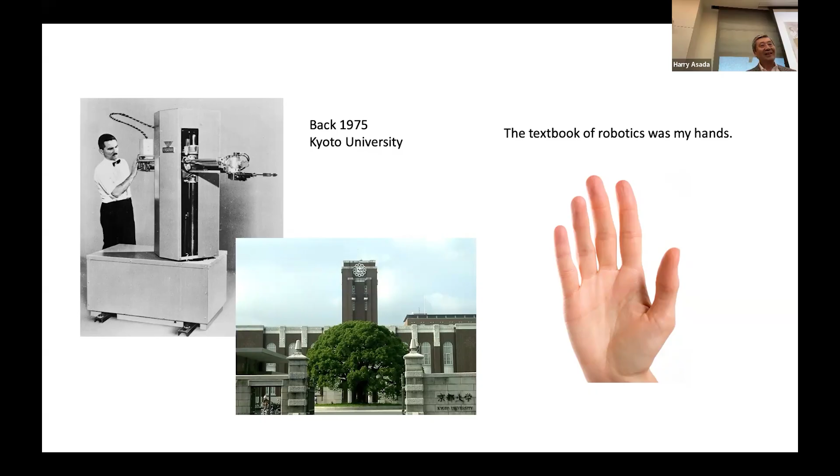So that's when I came up with the ideas on grasp stability. And that was initially my master's thesis at Kyoto University. This is to define some sort of potentials associated with the mechanical things that interact with the object, and that creates a kind of potential curve, up and down, depending on the shape of the object along with the robot hand itself. If you plot the isopotential curve on the pose, position, and orientation of the object, you see a nice local minimum here. This may be a good point because any deviation from this point creates a restoring force, which means a stable grasp. So that's a simple explanation.

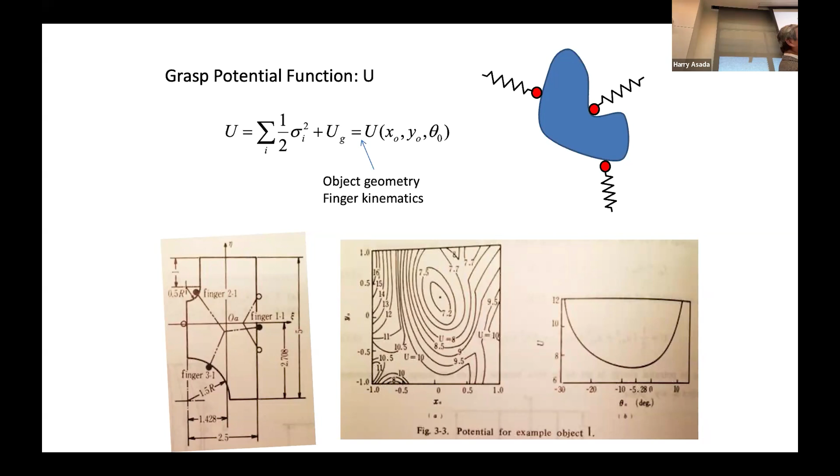At the same time, just several years after that, I found a very beautiful doctoral thesis by Professor Oussama Khatib, who also used potential functions for a totally different, clever use. Now, implementing the stable grasp or this kind of hand manipulation based on the compliance matrix, I had troubles because it's hard to generate and control the torque and force on the fingers. So I came up with this actuator design.

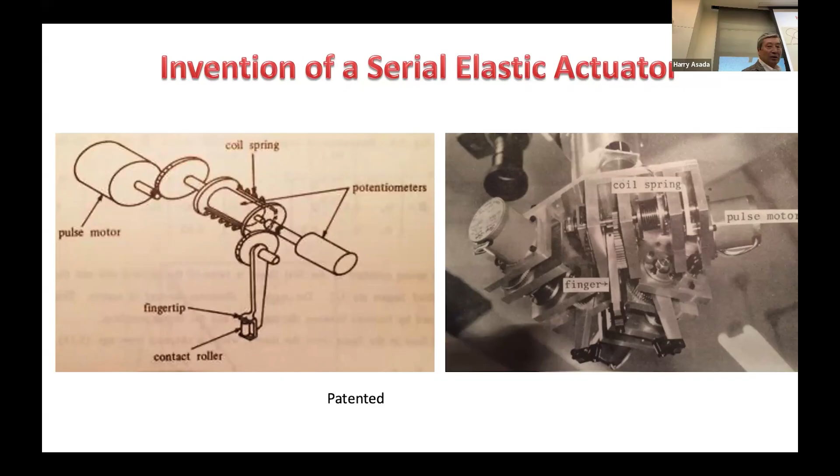This is the first serial elastic actuator, and the actuator here, then the fingers and hands are in between. We have a coil spring, and by measuring the torsional distortions of this coil spring, we can get the measurement of the torque transmitted, so closing the loop out of it.

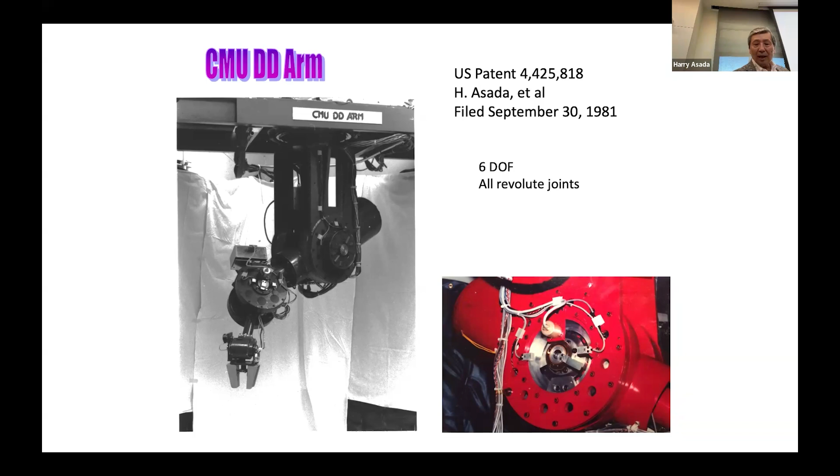Human-like actuation is so important, and when I moved to Carnegie Mellon Robotics Institute, I happened to find an article talking about a new type of high torque motor. At that time it was an emerging technology, rare earth samarium cobalt magnet producing 42 megagauss Oersted magnetic strength. That was actually a big groundbreaking thing. Together with high power MOSFETs becoming available, we could drive large current into this. That allowed me to develop the first direct drive robot, all 6 degrees of freedom. It's direct drive, having no gearing, so high, no backlash, and pure torque control.

That was immediately commercialized by Adept Technology in Sunnyvale, I think—I just forgot the name nearby. And then this spread out to many manufacturing sites. In Japan, Yaskawa developed the direct drive robot for clean room applications, handling wafers. This is a clever idea because direct drive doesn't produce any particles or dust from gear meshing, since there's no gearing.

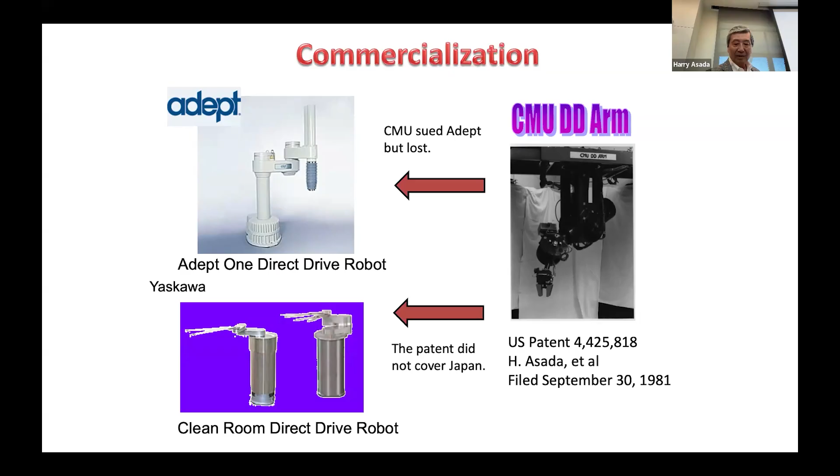Going to 2012 at MIT, around that time I'd been supported by Boeing for about 10 plus years, and I had a chance to learn at their manufacturing site. This is the final assembly of a wide body commercial aircraft, and you see those people working either on the ceiling or the ground. That kind of work is not good for the human. The human body is not designed for doing something near the floor.

This is the motion, and this is Boeing 767 cargo space assembly—you have to take this posture the whole day long. It's nice if you have extra arms holding your body, right? Because you need both your arms and feet when you're doing this.

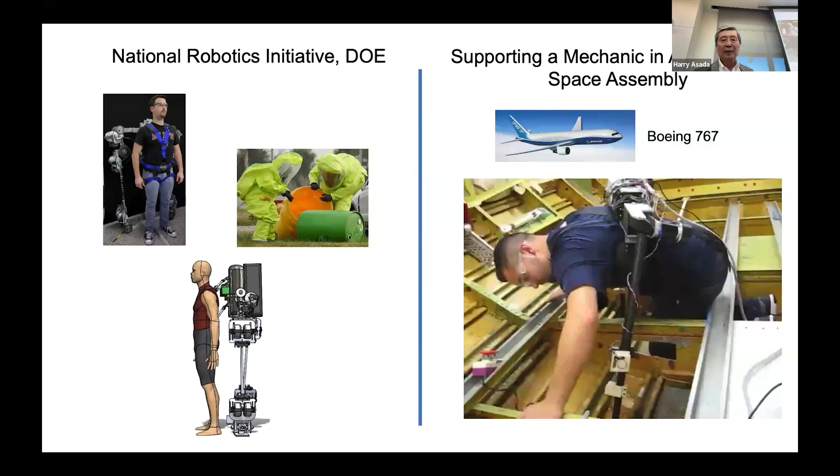Later, the Department of Energy provided a grant to develop assistive machines as shown here. Every year we came up with some ideas. What if you have extra limbs at certain locations? It creates all kinds of interesting things.

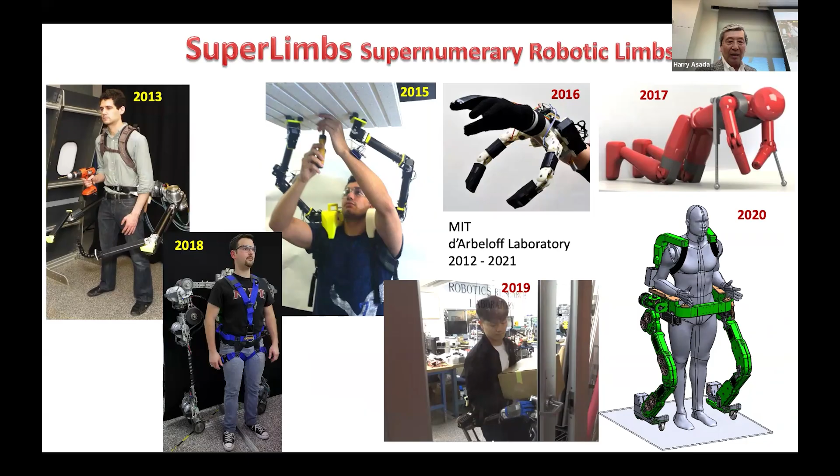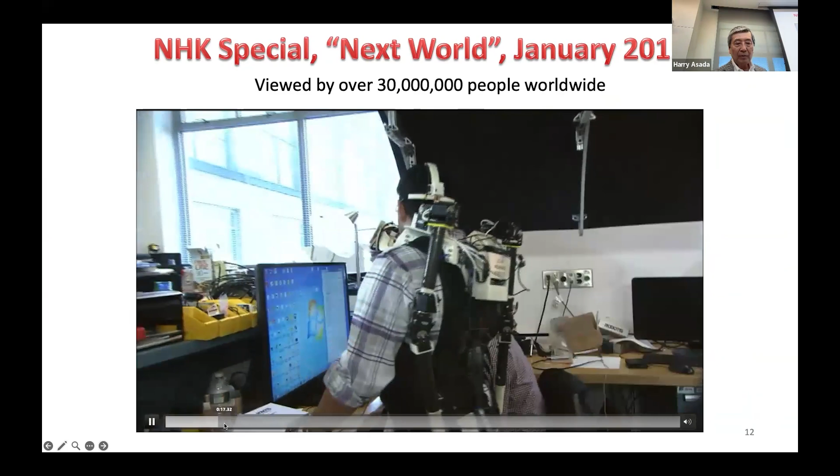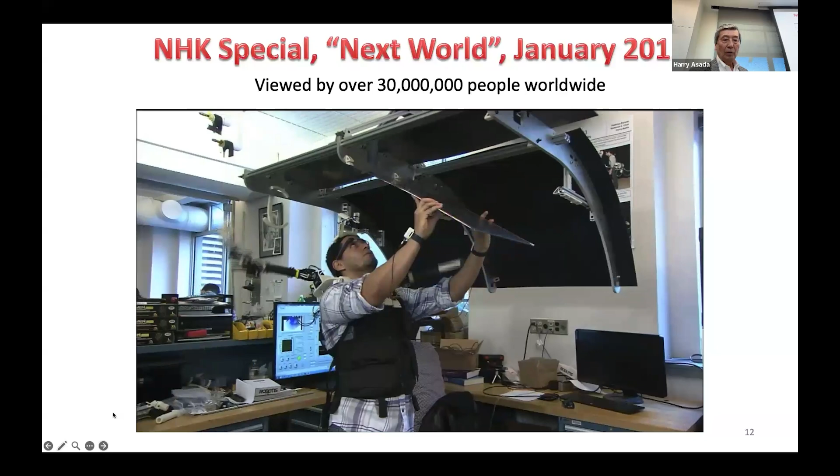And then actually, seeding work—at the Massachusetts Institute of Technology, robotics researchers are developing ways to add an extra pair of arms to your body. The robot will try to act according to what I'm doing. Robotic arms come to life thanks to artificial intelligence. The AI system monitors the wearer's arm movements, and eye trackers detect where the person is looking. From this data, it predicts the next movement of the wearer and automatically moves the robotic arms to a supporting position—no explicit human input is needed.

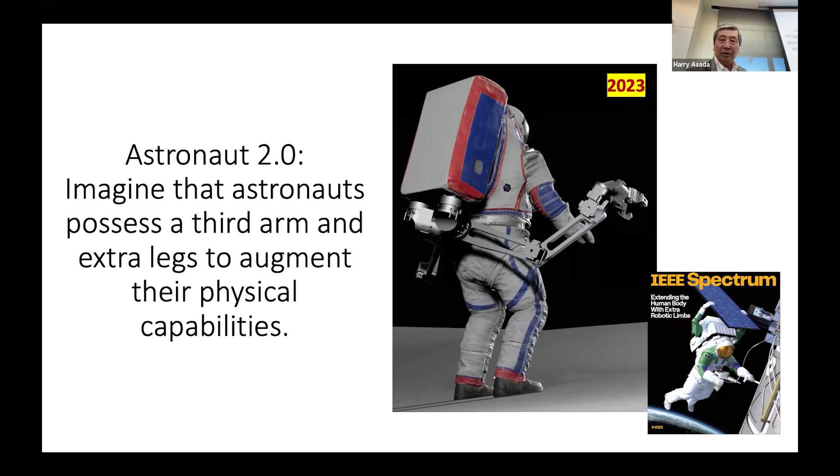Yeah, maybe that's good enough. But then the most exciting application I found for these SuperLimbs, supernumerary robotic limbs, is space applications. This is a 2023 IEEE Spectrum article. We can attach a pair of robotic arms to the life support unit in the backpack, substantially increasing the physical capabilities of astronauts. So going back to the moon, astronauts must conduct quite extensive physical work on the moon's surface, and that's actually a big question.

Remember that in the Apollo era, astronauts were superhumans, super athletes, but when they fell on the moon surface, it was hard to get up—sometimes they struggled for more than 10 minutes. So this is the reality.

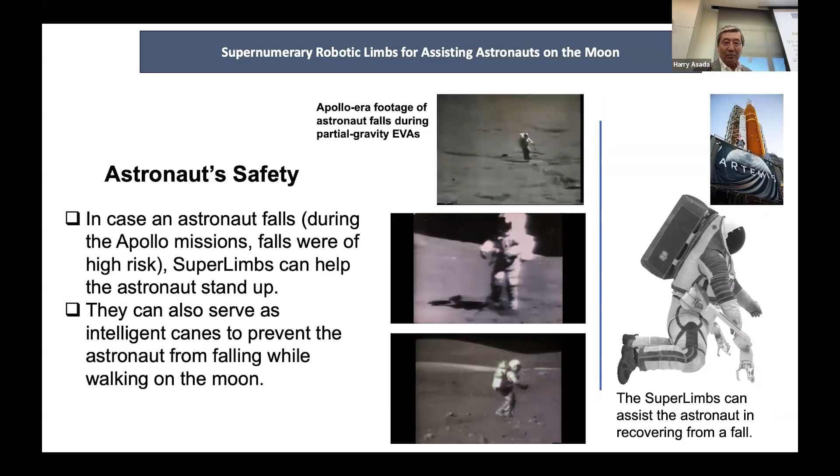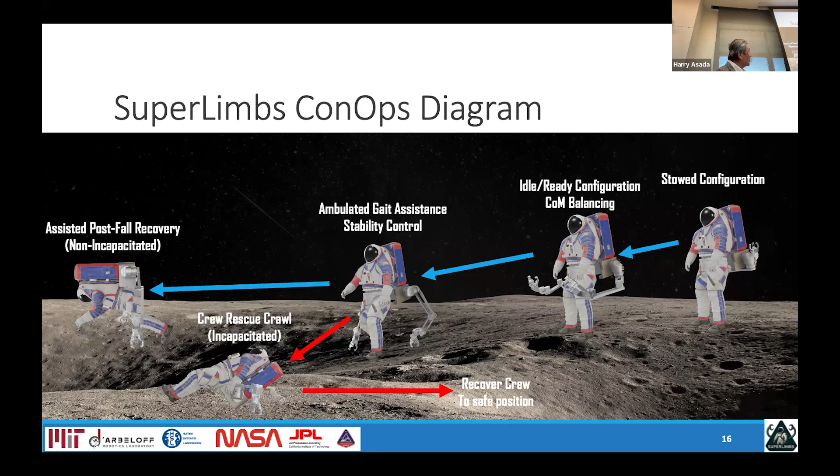So we propose: how about having a third arm and a fourth arm attached to their body? This is the stowed position, it comes in here, and when needed, it comes out to make balance or bracing, or if necessary becomes extra legs, so the human becomes a quadruped instead of a biped. That may be necessary when moving on very rough terrain. And once they slip or fall, we actually assist them to come back up.

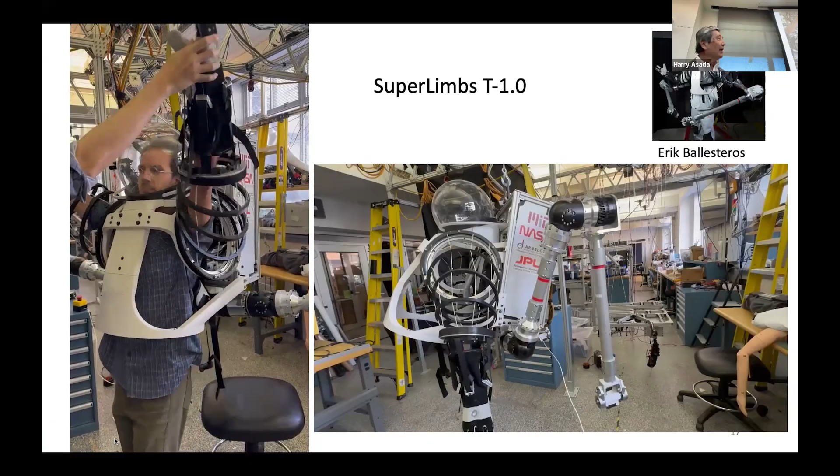So this is the most recent machine that we developed together with JPL. It's hard to get inside, but you see a pair of robotic arms coming out of it—it has a 4 plus 4, 8 degrees of freedom for 2 arms, and it produces plenty of torque to lift and to stop.

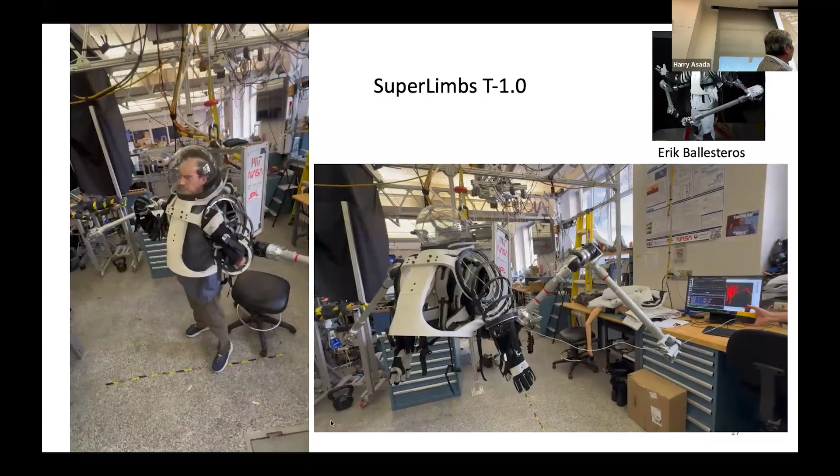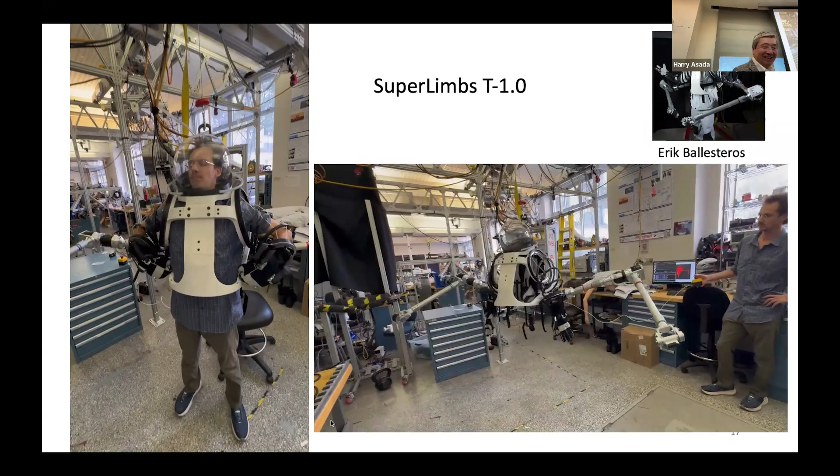Unfortunately, we haven't got the IRB approval, so I can't show you the real humans working together with this robot. So that's where we are.

And interestingly, the work on the astronaut assistance and elderly care, they are so close, because once you wear this space suit, it is pressurized inside, you know that, right? And it's just very stiff. So astronauts have to work against that stiff joint. So the net muscular strength is very small. Also, the visions are very limited, right? And then balancing is an issue, that they fall. The same story as we see in elderly care.

So fall is actually the big problem for the elderly community, and many of them underestimate the risk of fall. I'm okay, and then they fall. Or they overestimate the risk. I don't think I can do that. So staying, sitting on a couch all day, stop taking any necessary exercise, that actually increases the risk of fall further, and then they fall.

1 in 4 U.S. older adults, 65 or older, fall, and then totally 37 million fall cases are reported. So we need to do something to support the elderly person to take a safe exercise. And this is a robot holding. Well, in case she collapsed, she's young, but in case of the old person, the robot can hold. Or this is actually a new version. It's almost a passive one. It moves together with this Tai Chi exercise.

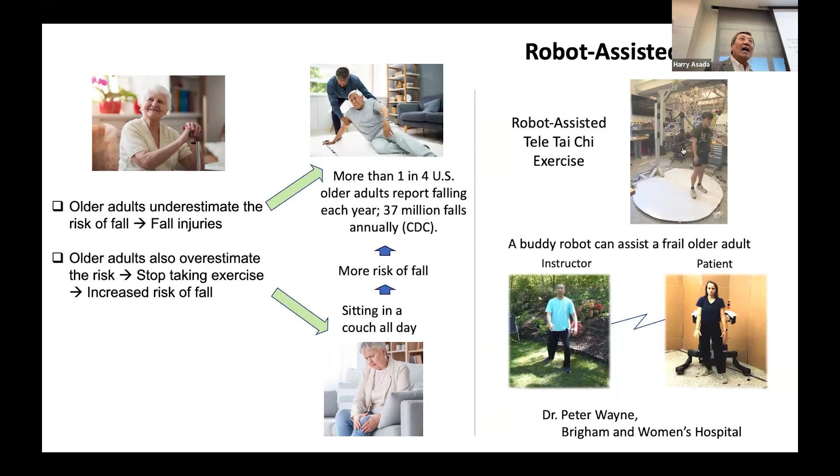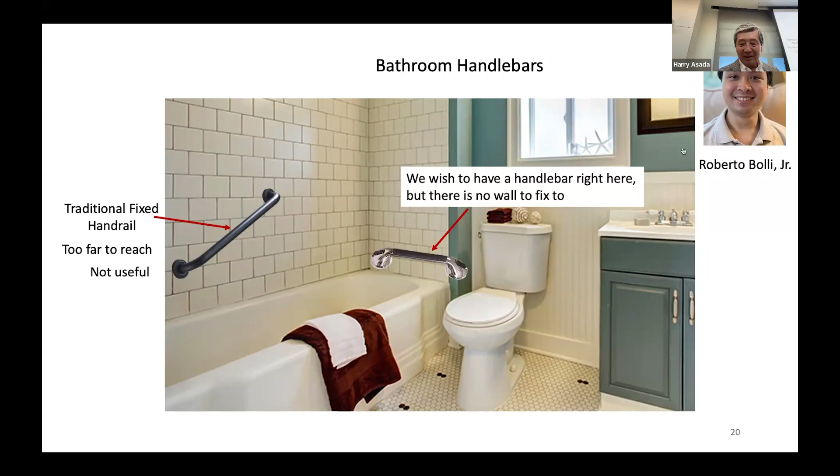Now, I think one of the most successful devices we have developed is so-called Handle Anywhere. So elderly persons today do need some handle to grab, right? And typically you place it in the bathroom like this. But fixing this handle rail on this kind of wall, it's too far to reach, and it's not really useful. We wish to have a handle here, but there's no wall. You can't put it here. Well, that's not the case if you have robotic solutions.

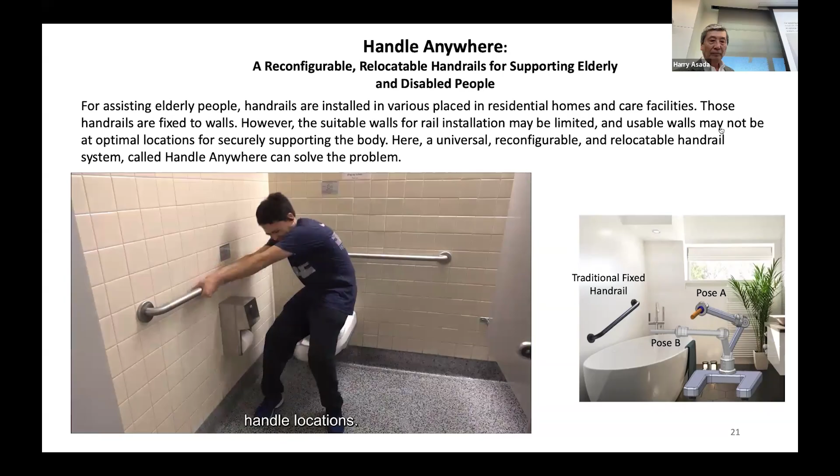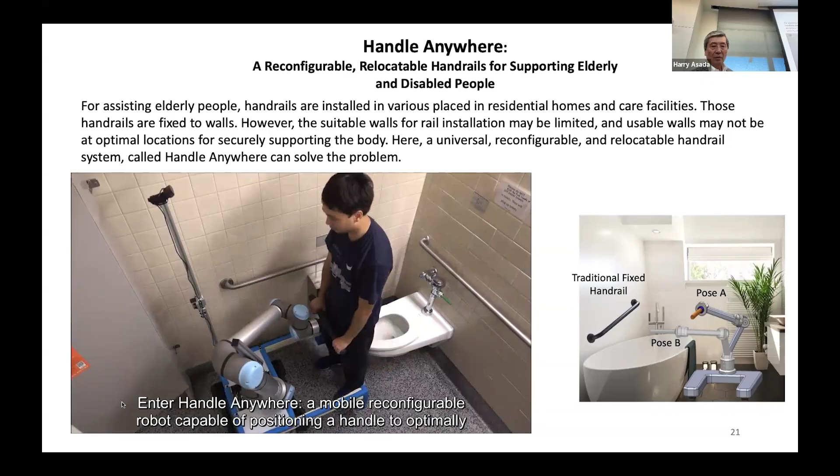As people age, grab bars are commonly installed around the home environment to provide stability and support for everyday activities. However, grab bars are costly and constrained by the room layout, resulting in suboptimal handle locations. What if there was a way to put a handle where it would most support the body? Enter Handle Anywhere, a mobile reconfigurable robot capable of positioning a handle to optimally support an elderly patient. Yeah, so this is the new version, E-bar, and we extended the capability much higher.

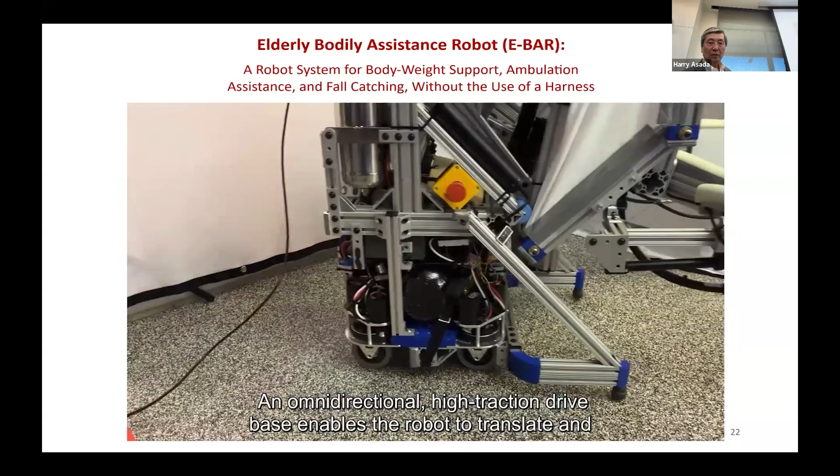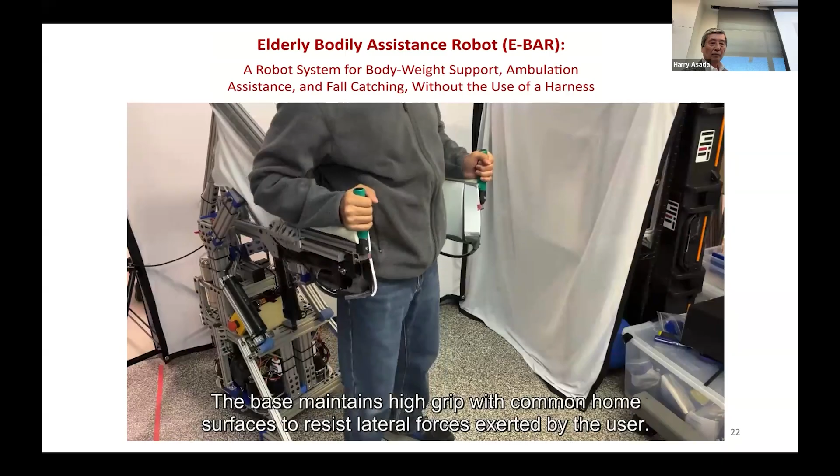Including lifting a person, assisting with postural changes and ambulation, and catching a person during a fall, all without the use of any wearable device or harness. An omnidirectional, high-traction drive base enables the robot to translate and rotate in any direction to support natural human motion. Each wheel's orientation and velocity are controlled independently. The base maintains high grip with common home surfaces to resist lateral forces exerted by the user. With a minimal width of 38 centimeters, the robot can navigate through obstacles in the home environment and has the ability to lift users across gaps such as a bathtub lip.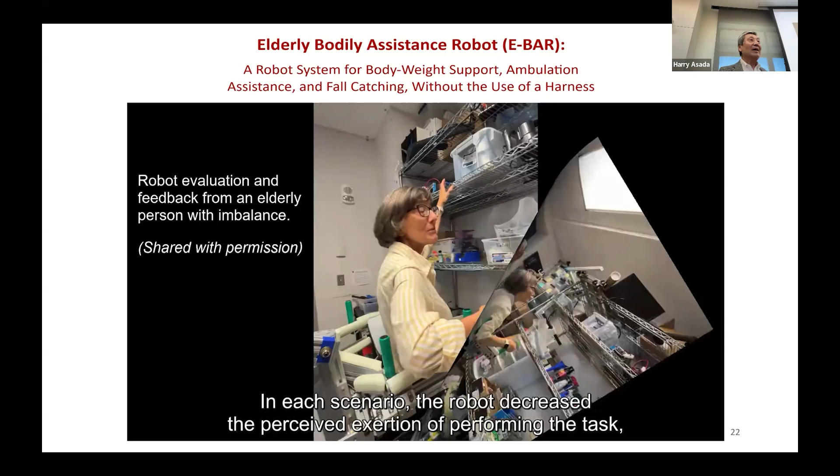Yeah, this lady, our neighbor, volunteered to be a human subject here. She had brain surgery some time ago, and every other month she slipped or nearly fell. So when she tried to reach some high locations, she had to hold something. And when she tried to reach some low part, it's very dangerous. So she needs to hold somewhere there. She needs something to grab anywhere. That's the Handle Anywhere concept.

So now the Handle Anywhere project is going further. We are developing new versions, virtually creating 3 grab points for the sit-to-stand process. We try to find the best location for the grab bar, and that actually varies depending on the process. This is a multi-phase process, and as a human stands up, the best location of the handle is different. So we have virtually 3 handle places.

I can't talk about elderly care without talking about the collaboration with Stanford, in particular Prof. Allison Okamura's group, with a fantastic project that I very much enjoyed, and I learned a lot, under the NSF Convergence Accelerator project: soft growing robots and mobility assistance. And everyone knows her groundbreaking new work on the application of the vine robot.

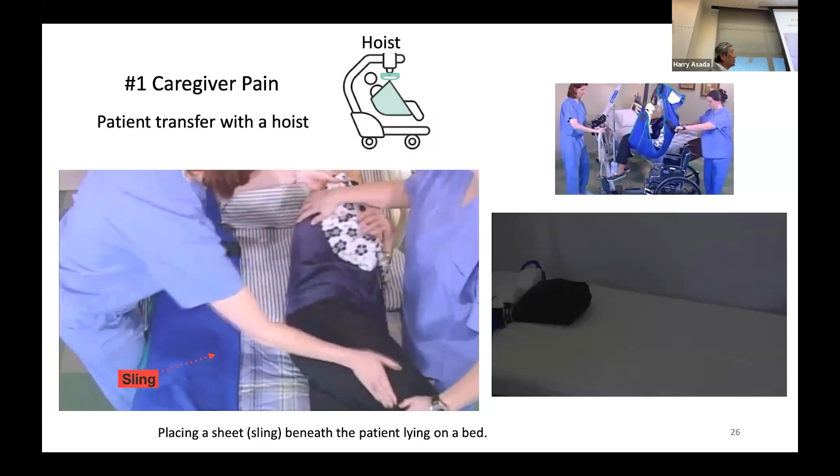And in this case, it's going beneath the person lying on the bed. So it's easy to lift up the person because the sheet is already in place. Before this, we had to do this kind of stuff. Two caregivers roll the patient on each side and spread out the sheet before lifting. So this is a very laborious process. Two persons are needed. It's much better to do this with Okamura's vine robot, which can do this very quickly.

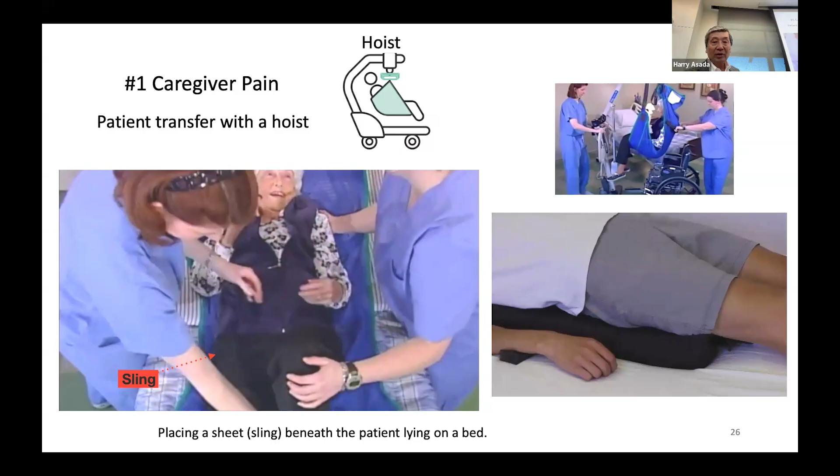So let me see. I just talked about many things. So how are you doing? Is this okay? Any clarifications and questions up to this point? Okay. So let's move on to the second half. Yeah.

On sale? That's actually what I heard, so show this to the people. Can I buy it now? Oh, well, this is still the research phase. So my students formed a company, and it's not actually this form, but they're putting together something to deliver the stuff to those people who desperately need it anytime soon. Okay, so let's move on.

So the next topic is actually back to that sit-to-stand problem. I said it's going through multiple stages: first, moving forward, creating a momentum. It is converted to upward motions, and at the end, we arrive at the stable position. Kind of a feedback control is working. We don't know when and how the feedback control kicks in, but there are some very smooth transitions.

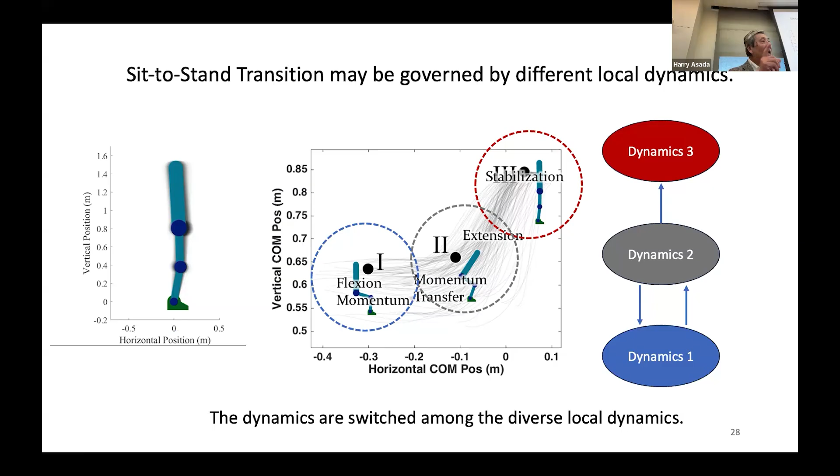So we found that humans are very good at controlling multimodal things. And this is so-called switched dynamical systems. Many of the hard robotic problems are basically related to switching of dynamical systems. In gait walking, you see the change of modes: one leg contact is basically an open kinematic chain, and with two legs it's a closed kinematic chain. Totally different dynamics are switched. We don't know exactly how they switch, but there's something going on.

Also, in manipulation, breaking and making contact changes the dynamics, and there's something we should explore in that. But it's actually a hard problem. Each dynamic mode is governed by different dynamic equations. We can simulate this process, but it's hard to gain the global picture of what's really going on, and actually come up with some feedback control. That's a hard problem.

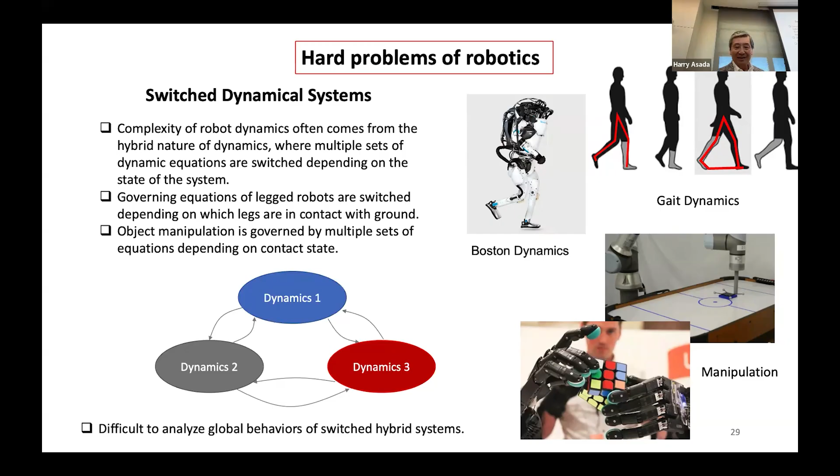So what I'd like to propose is to use the Koopman operator as a mechanism for unifying otherwise segmented and switched dynamical systems, subsuming all the segmented dynamics within a globally linear model, which is obviously very amenable for control. This is kind of strange because each dynamics is nonlinear, and putting them all together, we write one equation which is globally linear: A times something plus B times the input. This is just the standard linear state equation that you learn, right?

So once we can transform this into this form, we can use any kind of rich linear analysis and control techniques, including model predictive control. It turns out that this optimization is convex, and that's very efficient in real-time computation. I want to show you this applied to both locomotion and manipulation. Locomotion is the rimless wheel, and then pushing and shoving. If time permits, I'd like to talk about sit-to-stand transitions, which is a human neuromotor control problem.

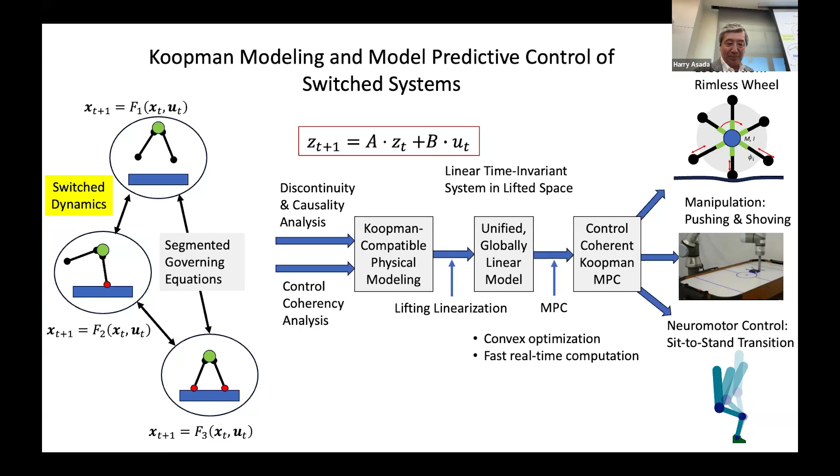So first, let me describe how this can be reduced to this form. There are certain conditions the system must satisfy, and that is something I'd like to explain. First of all, the Koopman operator is very mysterious, and I think some of you already know it, but bear with me; I'd like to explain this in a very simple and intuitive manner so that everyone can understand the basic principle behind it.

So let's consider the nonlinear dynamic system in discrete time. F is a function mapping x_t to x_t+1. Now we also consider a set of orthonormal basis functions, phi_1(x), phi_2(x), and so on, in the Hilbert space; don't bother about the Hilbert space.

So we consider the composition of the basis function phi_i with the self-map, this state transition function F. What this means is that we replace the x here by the function F(x), and we write it phi_i, small circle, capital F. This is a new function, and if this function has good properties in the Hilbert space, this new function can be expanded into a series of the orthonormal basis functions phi_i.

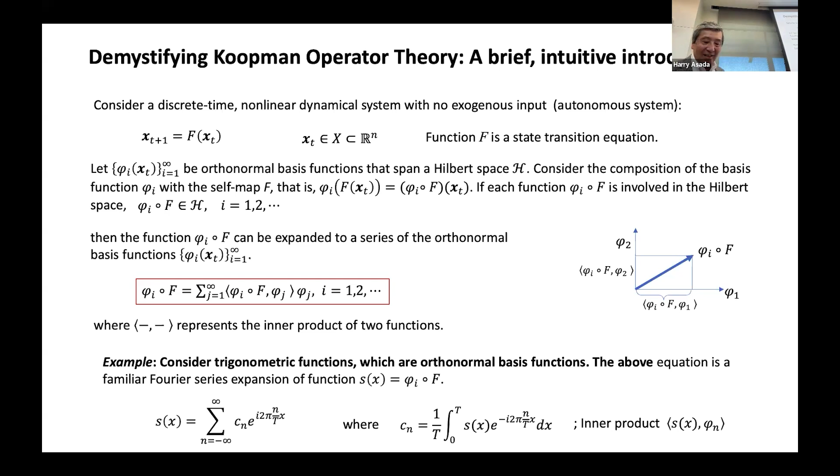So this is something, doing this. But this is a very important expression. Just keep in mind that this guy is to be transferred to the next line. So here, on the left-hand side is phi i small. This is the compositional function, and what is inside is actually phi of f(xt), and f(xt) is basically the state transition function. So what this means is basically xt plus 1.

This guy. So this one really means that the values of the orthonormal functions, the directions, evaluated at the next time t plus 1, state xt plus 1, equals phi j of xt, right, weighted by these coefficients, which are actually constant, and then we can put them in aij.

So what this means is that the next step of the state phi t plus 1, viewed from your new coordinate system, which is actually orthonormal, where we put all these elements into a big vector, which is infinite dimensional, is given by this coefficient aij times the current time xt's states, the big ones, and in between you have this matrix aij. So this one is linear. We started with nonlinear, but this is linear.

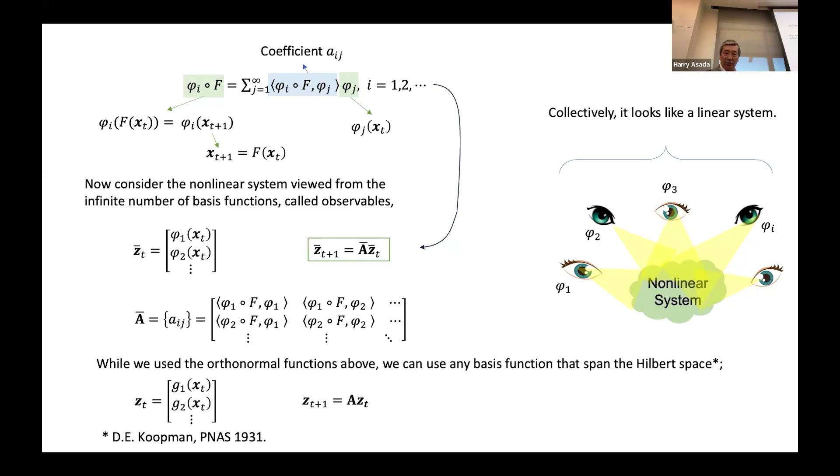I started with the orthonormal functions to begin with, but it doesn't have to be. You can use any basis functions that span the Hilbert space. Then we can do that. So we can very much relax these conditions, shown here. Now, this is actually the original Koopman operator theory. Unfortunately, this is applicable only to so-called autonomous systems, with no control input.

So, no control, no u, and what we are interested in is something where you have control terms over here, right? So the first job I did was to expand autonomous Koopman to non-autonomous Koopman. This is a hard problem, but the idea is the following. This is the full nonlinear state equation, xt plus 1 equals f of xt, ut, and this is not actually the form where the Koopman operators are applicable. So we do some special treatment.

First of all, we divide the independent state xt into two parts. One is the state variables related to the actuator side. The Qt is all the other things, the plant side. So we divide it into these two, and then we assume that the input ut terms show up in these nonlinear equations in a linear form. BP is constant. We found in many systems that this kind of linear control term can be found.

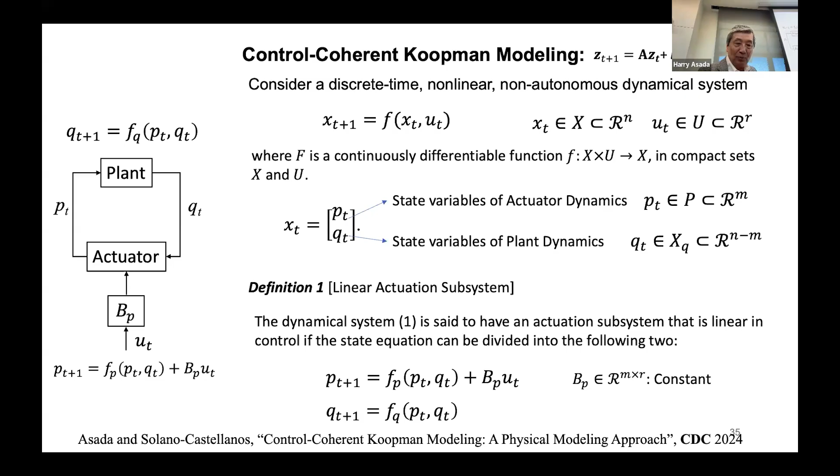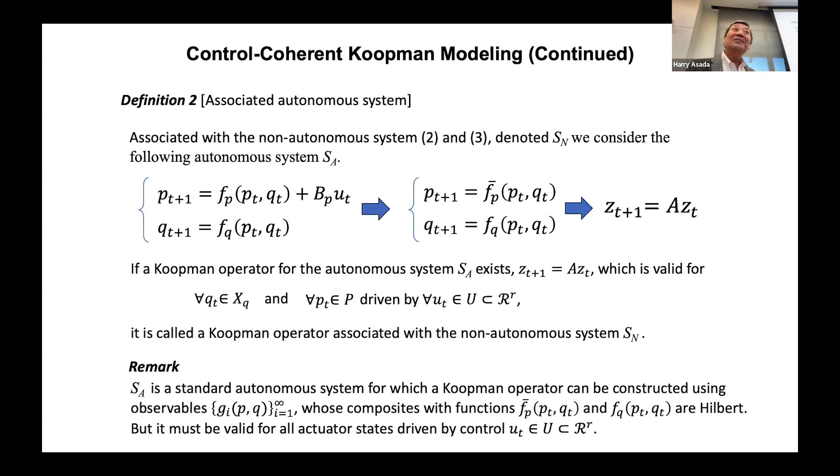So once we found this kind of relationship, we can apply the Koopman in the same way as the original form. First, we get rid of these terms and work out the autonomous system. This is a standard Koopman operator problem. We can reduce this one into this high-dimensional linear form. And then after that, we can simply superpose the linear control terms. The proof is a little bit more involved, but that's all you need to know.

More importantly, the conditions under which this method is applicable are that the control input appears linearly in the actuator dynamic model. So this is modeling property 1. And then also, importantly, the actuator and the plant have independent state variables.

So to satisfy these two conditions, let's look at just standard robotic systems where we have motors and the gearing, oftentimes harmonic drives, and then the arm load. So if we include the harmonic drive's compliance, which is somewhat significant, the joint displacement and the motor axis displacement can be treated as independent generalized coordinates, so independent variables. And also, if you put together the equations of motion of this motor, since motor rotor inertia is constant, the input appears here linearly.

We found similar things in the hydraulic and pneumatic soft robotic systems too. And also interesting is to look at the bio and mechanical muscle systems too, having nice springs in there, and that allows us to apply the Koopman models.

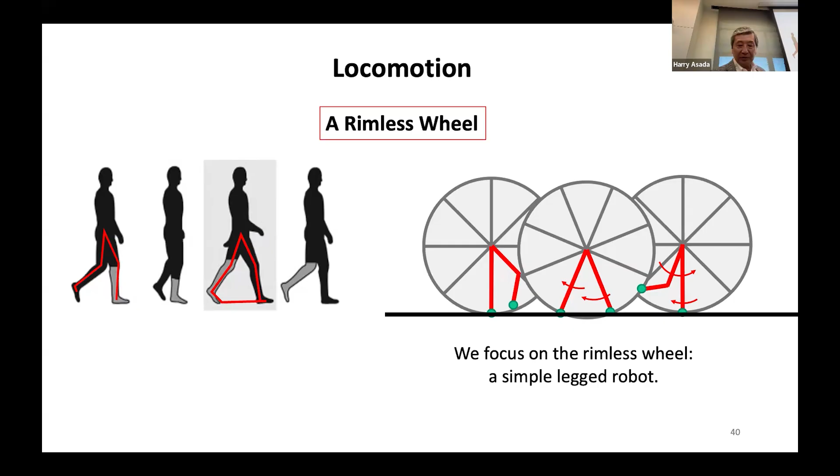Okay, so let's look at the locomotion problem. The simplest model that we like to look at is a rimless wheel. The rimless wheel is mimicking some of the human gait in the simplest form, but we push it a little bit further to make it active. So in this case, 6 spokes, 6 legs, each having an independent actuator pushing the legs, changing the spoke lengths. To describe the hub we have x, y, and theta, three coordinates, along with the spoke lengths generated by the actuators, in this case 6 spoke lengths.

Are they independent of each other? Well, when it is airborne, absolutely, they are independent. But if they are in contact with a hard surface, some conflict happens. The x, y, theta side and the phi side cannot dictate their positions independently. They have to conform to some constraints. So that kind of conflict occurs. But if you consider some compliance at the floor or the spoke, we can resolve that kind of conflict. So compliance is very important here.

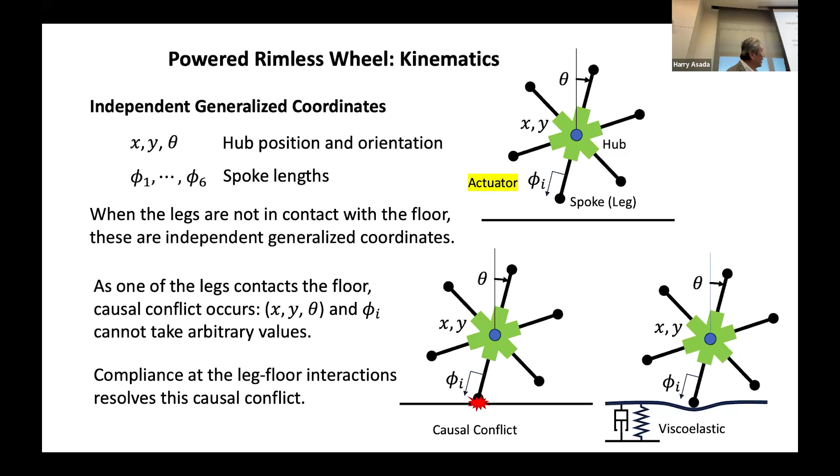And in the legged research community, they have been studying the compliance of the foot and the floor for years. We just pick the best one and put together the actuator side of the dynamic equations. Although the ground reaction force is a highly nonlinear term, if you look at the actuator dynamics equations, all the inertia reflected to the actuator axis is Im, which is linear and constant, and the actuator torque applies here. Because Im is constant, the actuator input is introduced linearly. Even though this part is nonlinear, that's okay. So having this compliance with this dynamics, we solve two problems.

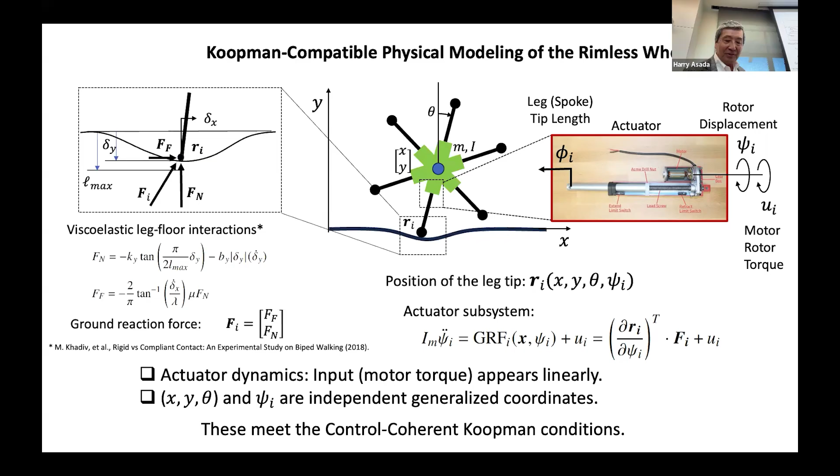One is that the Koopman operator can be applied because of these two independent variables, and switching from no contact to contact is not discontinuous because of this compliance. So these two support the application of the Koopman method. Again, the actuator side of the dynamics can be reduced to this linear form, along with the nonlinear terms. The hub side of the dynamics is governed by the ground reaction force, which is highly nonlinear, but there's no direct channel from the input u to this dynamics. So that satisfies the conditions, and then we can build the Koopman model.

So interestingly, this is a linear model. We apply it to model predictive control, using a penalty for tracking deviations and a penalty for the control cost, subject to linear dynamic equations along with some other linear constraints. We can solve it very simply. Looking at the time horizon, it goes through contact state transitions, but along this time horizon different modes of contact can be predicted.

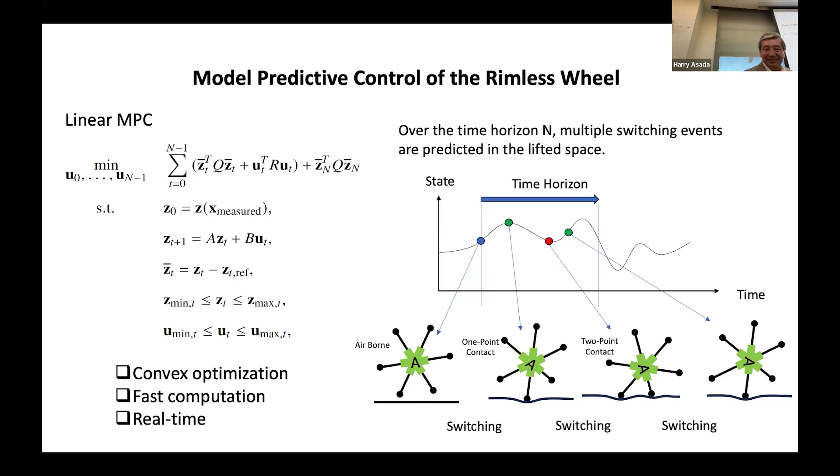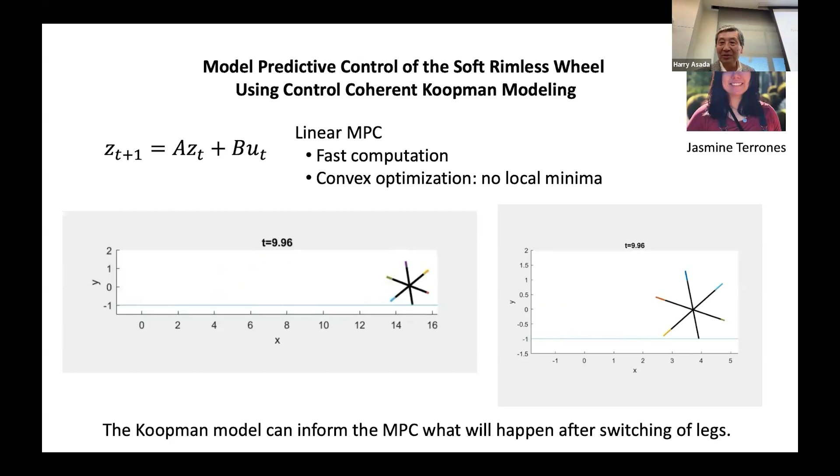So it goes through the different contact domains, with boundaries existing. If you just take a Taylor expansion type of linear approximation here, you have no clue once it moves to these regions, right? No information about it.

But Koopman, because it's globally linear and subsumes all dynamics, knows what's going to happen after you make the transitions like this. Of course, this works when you can foresee a certain time horizon. If the time horizon is very short, it cannot actually discover the right schemes. And expanding the time horizon to 12, okay, very beautiful. 8, we can make it.

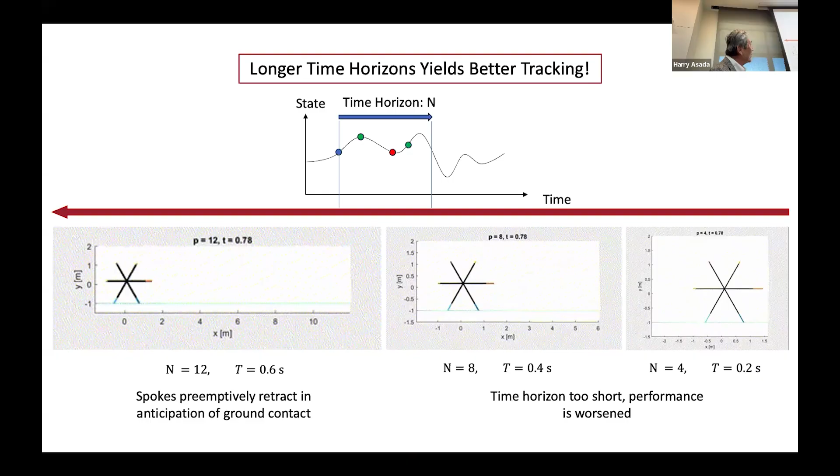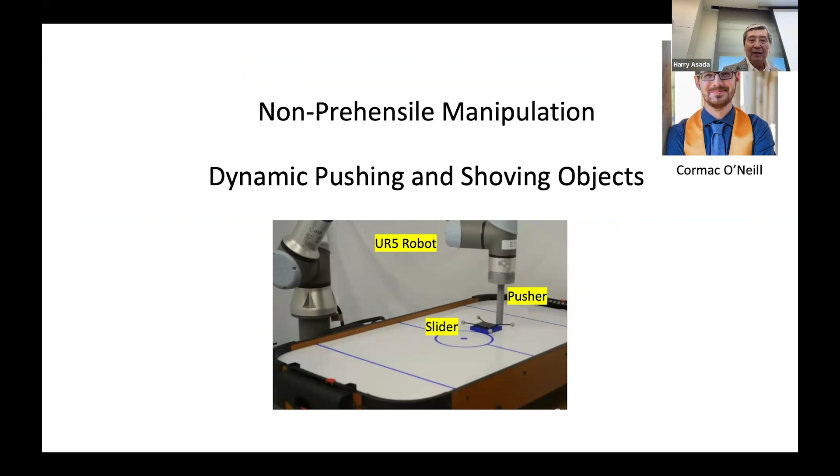Now let's look at the manipulation. So this is actually non-prehensile manipulation. And so this is sort of the state of the art, I would say, about several years ago by my colleagues François Hogan and Alberto Rodriguez. They did a beautiful job manipulating this, but they have to assume that this one is quasi-static, and the contact must be maintained all the way through.

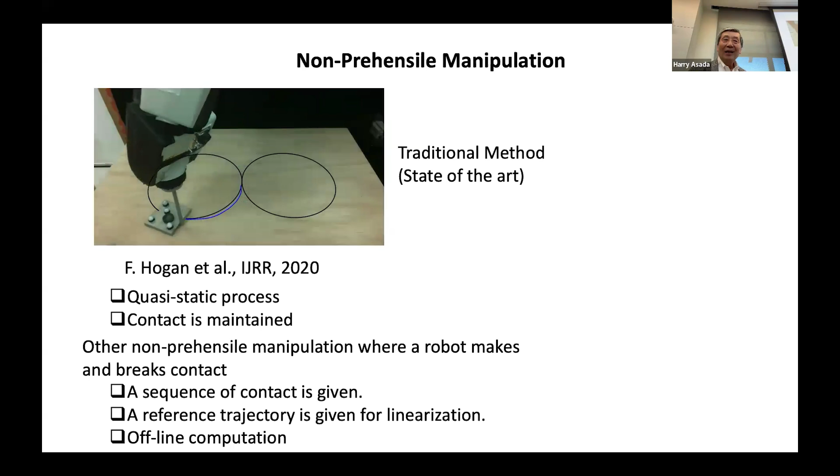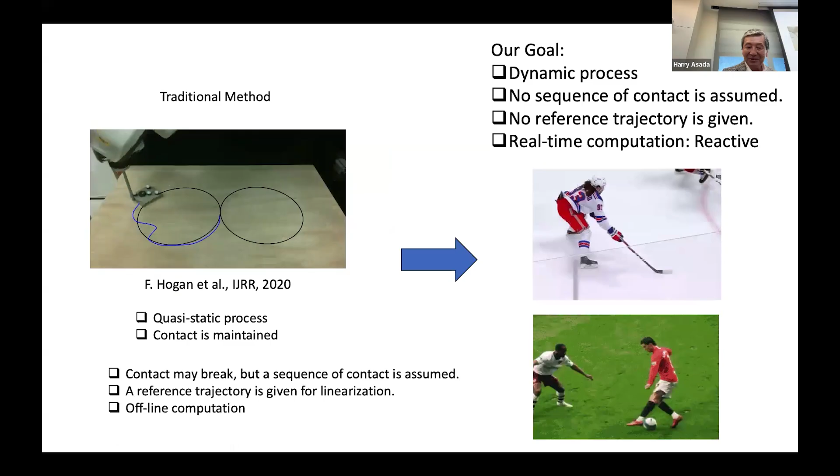But my interest is going to this, right? Humans are much more dynamic, kicking stuff, sometimes dribbling something, shooting. Yeah, that's what we want to do. How can we move up to that point? Well, we did it with this simple robot, this UR5, having pretty good and high fidelity velocity control.

So actually commanding each X and Y axis, moving at the specified velocity UX and UY. And then the resultant position is simply the integration of these two. So we treat all this as actuator dynamics, with the inputs UX, UY involved linearly in this actuator dynamics. And then the integrals PX, PY are the state variables on the actuator side. Now, on the object side, the slider side, we have 6 state variables, X, Y, theta, and their time derivatives. Are they independent or not?

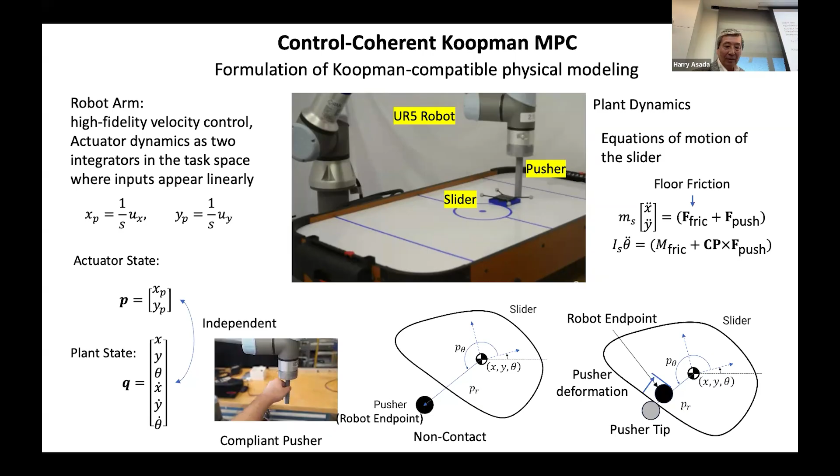We have to include some kind of compliance, so we intentionally use some compliance on the pusher like this. The indentation into this creates a force in proportion to the displacement. That's the system modeling we did. So with that, we first model this, and then the next big one is that we have to create these basis functions, called observables. What sort of functions can do a very good job at that?

We use a deep neural net, providing some data, data-driven systems. It defines the best set of basis functions or observable functions, because it has to be in a finite state, and depending on the quality or effectiveness of such functions, sometimes convergence is very slow, and sometimes it's very good. So the neural net is very effective in finding that kind of stuff. With this, we formulate the Koopman models, and then go to implementations.

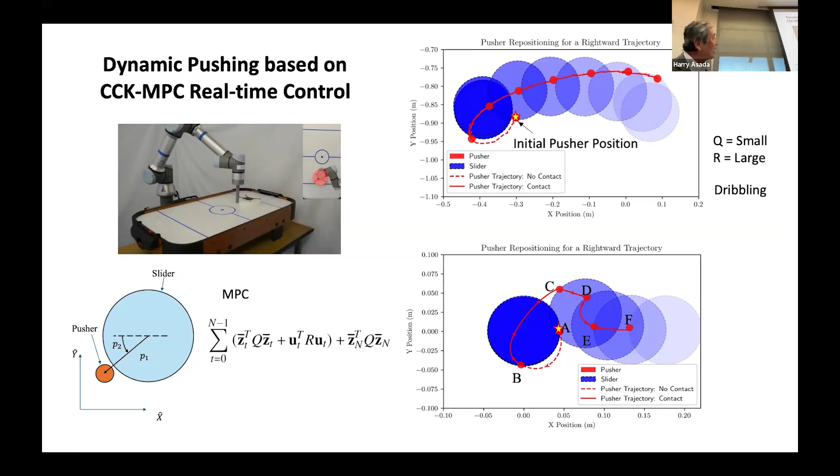So these are just a few results. The task is to move the slider from this point to this position. And the initial position of the pusher, the robot, is here. So you can't pull this guy towards this direction. It's only pushing, not pulling. So the MPC controller finds a way of doing that. First, detach from this surface, move to this point, and then start pushing it this way. That's the control strategy discovered by the MPC together with the Koopman model.

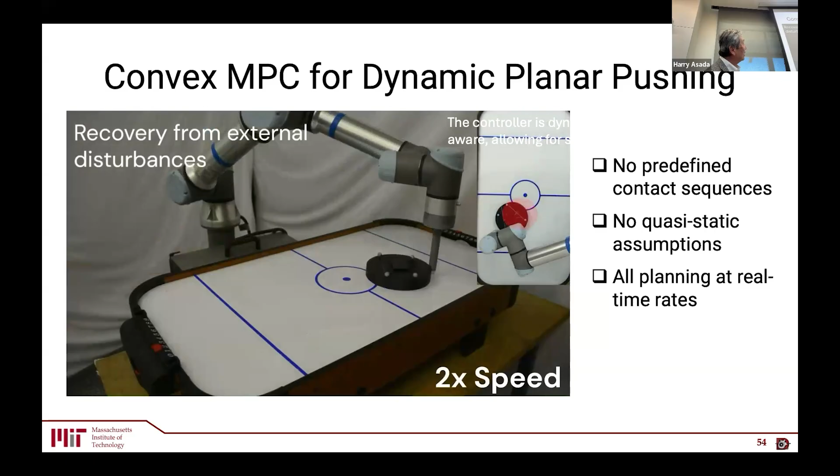So it's really dynamic, and I have to say that it is very much reactive. When you disturb it, it can react very quickly, because of faster computation; we found it almost 100 times faster than traditional computations. You see that the average time cycle is 5.3 milliseconds. We set the goal at 10 milliseconds; it's much lower than that. Almost 100 times faster than its traditional counterparts.

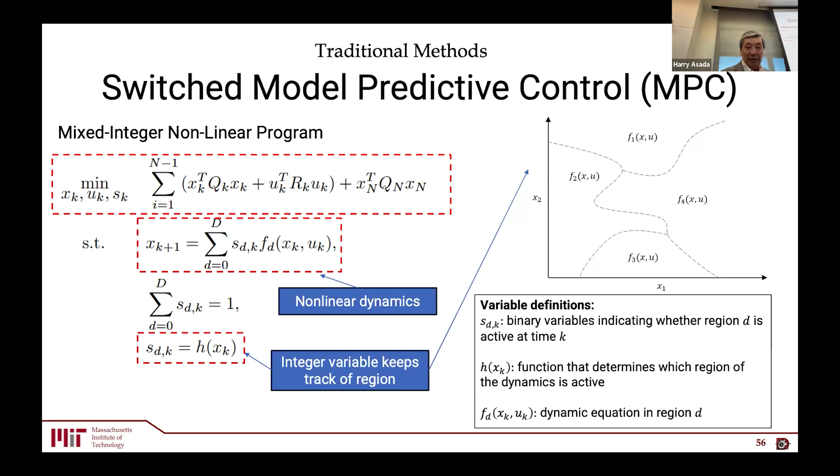The traditional counterpart in this case is to compute this program. It's basically a hybrid thing, so you have to switch over. It turns out to be a mixed integer nonlinear programming problem, and that is notoriously difficult to compute because you have to select which mode is active. Those are integers, and they must be optimized. That means the contact sequence must be optimized together with the whole detailed optimization. Compared to that, 100 times faster. And it's reactive, so disturbances can be treated very nicely.

Now, another very interesting point I'd like to mention is that it can switch between dribbling and shoving, or kind of shooting.

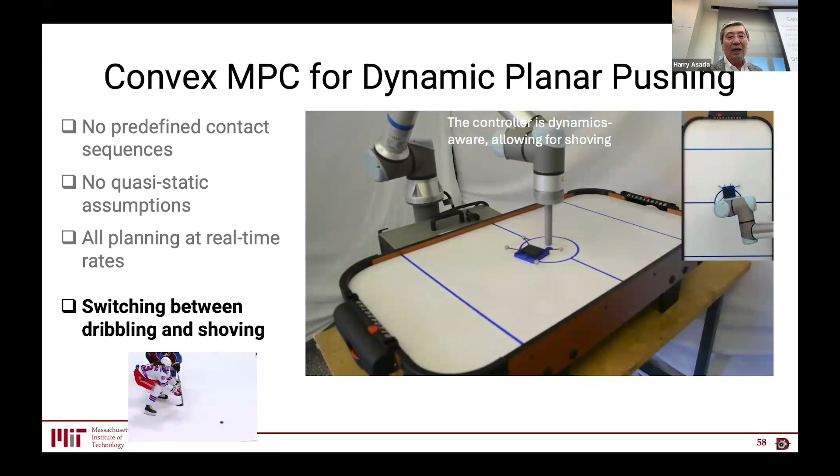We did not touch anything in terms of the basic structure of the systems, but shown here is that we just tweak the tracking error and penalty, the Q is increased, and then reduce the control cost so that big motion is allowed. It turns out the UR5 finds new goals far from here. Then what happens is...

...switching the mode from just dribbling to a big shooting happens. We did not do anything special, but just setting up these parameters, the system can actually find the best strategy in reducing this given cost.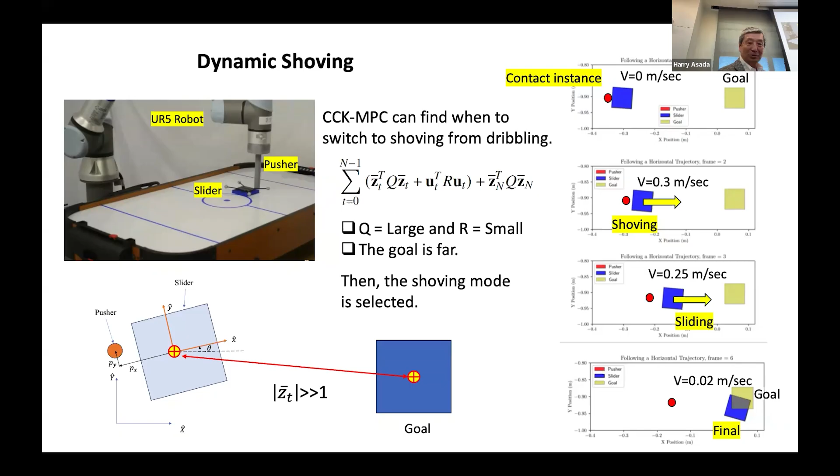So after this point, you may feel that this is too good to be true, or that I'm showing only champion data. But in fact, we did very thorough parameter studies. It's not just good luck.

First, one parameter which is very much questionable is the friction. Sliding here, what is the friction between this? It's really hard to estimate. If the friction is properly and correctly estimated, it shows very precise dribbling, even with a little disturbance. On the other hand, if the real friction is much lower than the values used for computation, it tends to overshoot, so things are more erratic. Although feedback control can manage this, the error is very big.

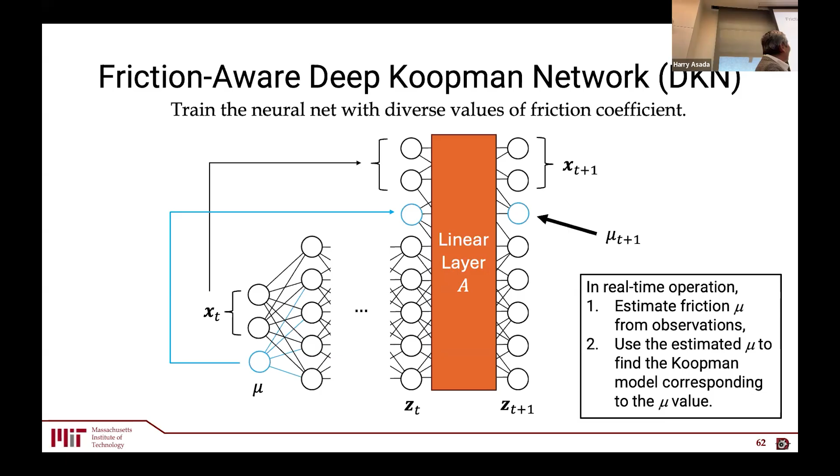So one technique we found very effective, we call the friction-aware deep Koopman network. We include the friction coefficient mu as an additional state given to the network, and we train the neural net for a wide range of friction mu values. This is a larger scale Koopman operator than with a single mu. In real time, we do parameter estimation, the effective mu is estimated at that point, and then we put that estimated mu value in, which evokes the particular Koopman matrix A associated with that mu. Thereby we can make it adaptable to the original program.

So this is a plot of squared error versus friction. First, with no friction adaptation, there's a pretty large error happening. If the friction is very small—not a matter, but very slippery, isolating type of thing—we get a big error. On the other hand, applying the friction-aware deep neural net, knowing the right friction and making adjustment, we lower the error quite significantly.

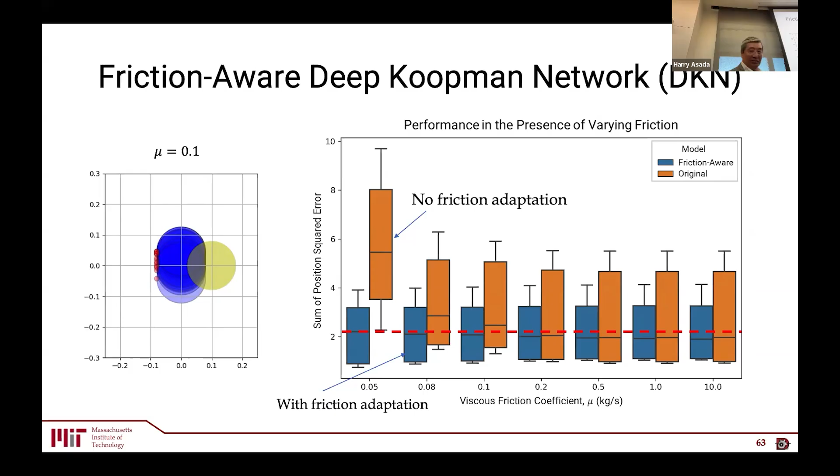Another very important thing—I'm pretty sure some of you raised this question—our formulation so far is highly hinged on the compliance involved. So what happens if the compliance is very low, very stiff? You may have trouble here. Does it impact the Koopman prediction accuracy? Is there any fundamental limitation to that? So we did a parameter study, shown here.

The vertical axis is prediction error, and the horizontal axis is stiffness, shown on a logarithmic scale. Please look at the blue line—error is pretty low, so it's good, and then from a certain point it jumps at extremely high stiffness. We had trouble actually estimating the actions. So there's some limitation to it.

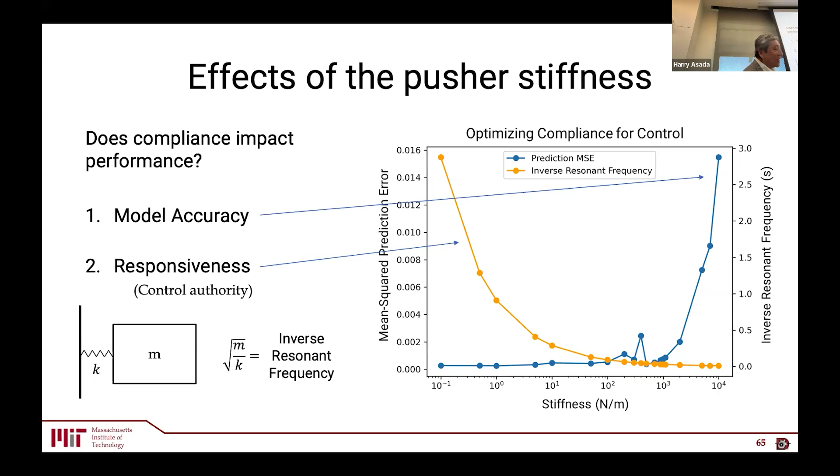Now look at the other side. Suppose the pusher compliance is very soft, too soft. What happens is you have to push a lot—you have to travel a longer distance to create the force. That turns out to give you quite a significant phase lag. So we took the reciprocal of the resonance frequency as a surrogate for this control authority, control fidelity, and that shows up here. Too soft is not good. There's some kind of sweet spot somewhere here, which is actually good in both senses.

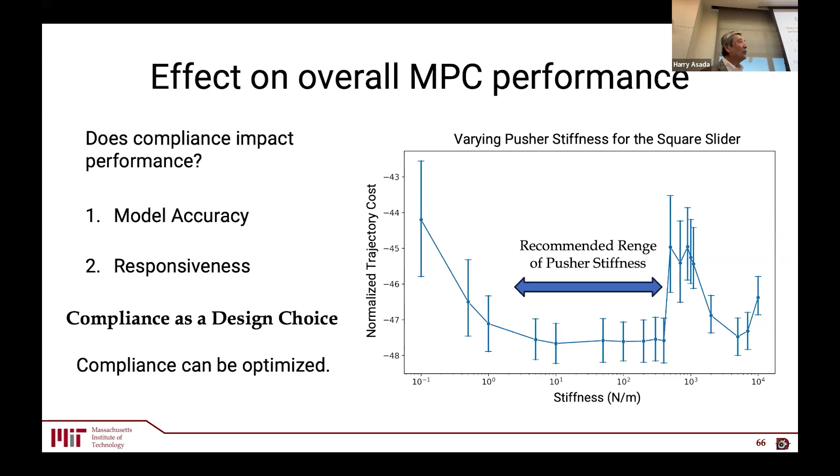Then we look at the overall MPC control performance, the trajectory cost, and there's actually a band between here and here—it's very nice, giving excellent control performance. So the story is that yes, we have some limitations, but think about this compliance as a design parameter. You can pick the compliance at the tip, whatever it is, so that the overall control performance will be maximized and optimized.

So this is kind of flipping the question, but we can make it actually the best from the control viewpoint. So I've been talking about this stuff, and that finishes locomotion and manipulation. And if time permits, I'll just briefly talk about neuromotor control and sit-to-stand transitions.

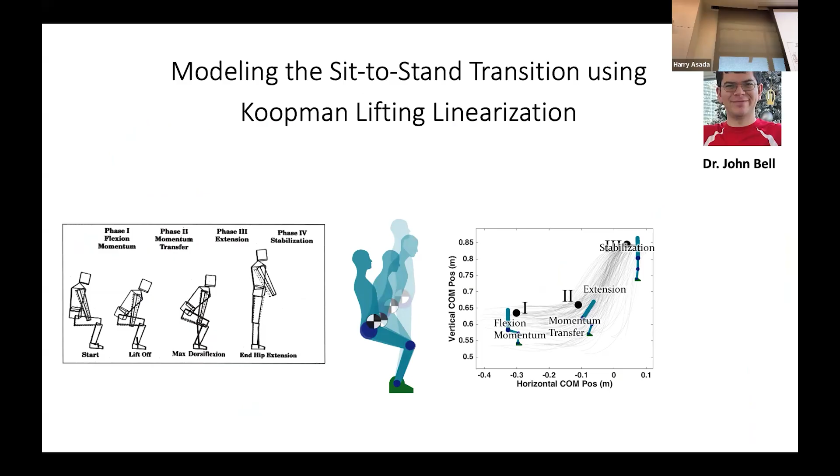And here, modeling the sit-to-stand transition. As I said, it actually goes through at least four different discrete modes of motion. This is the experimental trajectory, shown as a solid line, of the center of mass of the human subject, moving from here to this point.

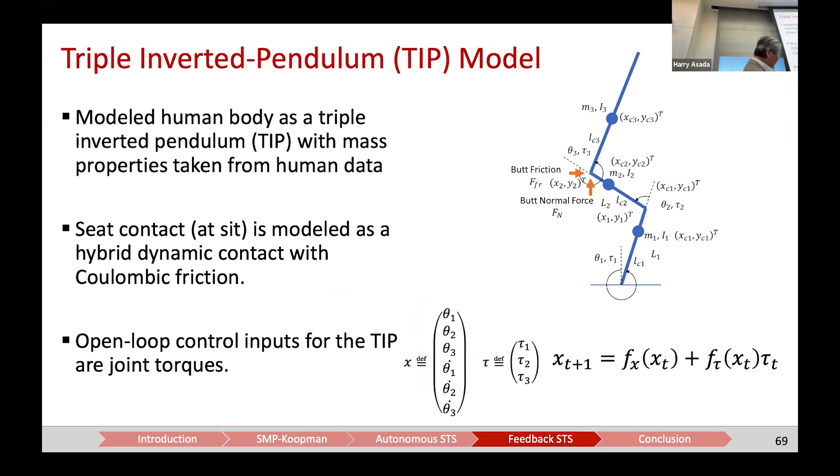And then we apply the following techniques. First, the human body is treated as a triple inverted pendulum, just like the robotic case. The equation of motion can be written in this form, where unfortunately the joint torques are multiplied by some coefficient which is configuration dependent. So in this form, the Koopman operator method cannot be applied directly.

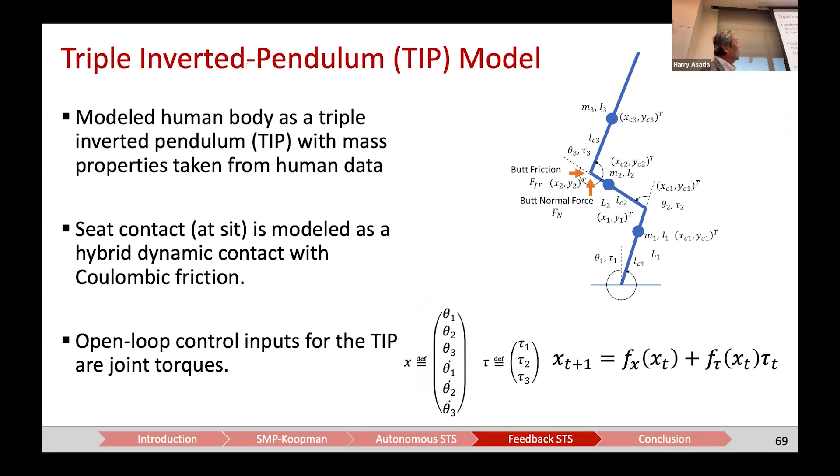But if you look at the muscles, interestingly, muscle has nice compliance, and we model that dynamics. It turns out that the muscle dynamics, looking at them individually, can be treated as independent state variables. And then nerve signals can be treated as a new input to the system, which shows up linearly.

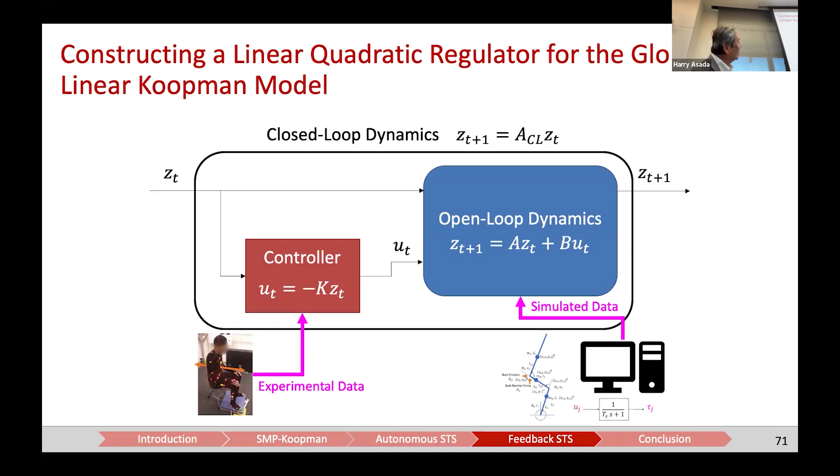So with this, we can successfully formulate the Koopman model, and to this we designed a linear quadratic regulator. This is a kind of state feedback K multiplied to this to improve the response. It turns out that the experimentally obtained trajectory can be simulated by tweaking and optimizing the parameters involved in the linear quadratic regulator. Remember, there are four very different stages of dynamics all mixed together in one equation, and it's linear, so we can apply the LQR algorithm.

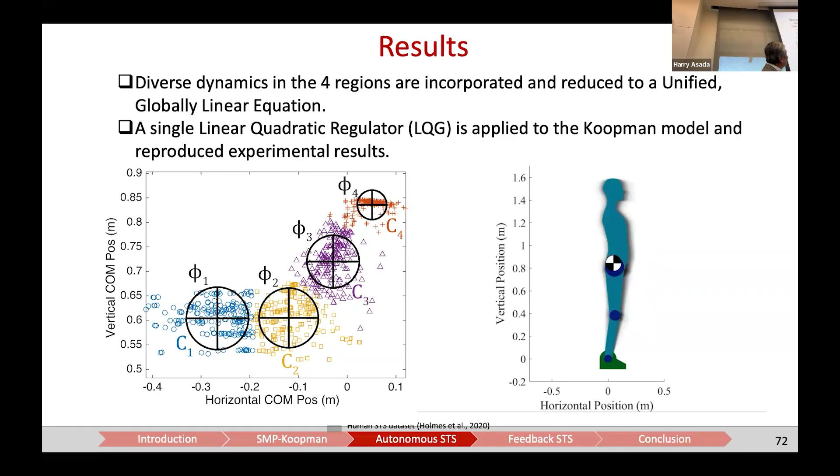So just a quick summary. I introduced the Koopman operator as a mechanism for unifying otherwise segmented dynamics and subsuming individual local dynamics within a globally linear model. Then I went through the kind of physical modeling under which this global linear representation is possible, and then applying MPC, which basically made a breakthrough from my viewpoint, because before it was so hard to do real-time control for MPC.

Now it's possible. More interestingly, viewing the transitions after going to different regimes, it can foresee what's going to happen. Based on that, the MPC controller can discover elaborate control strategies, even though we did not do any spoon-feeding or guide them to certain solutions. It's very simple, yet it made something possible.

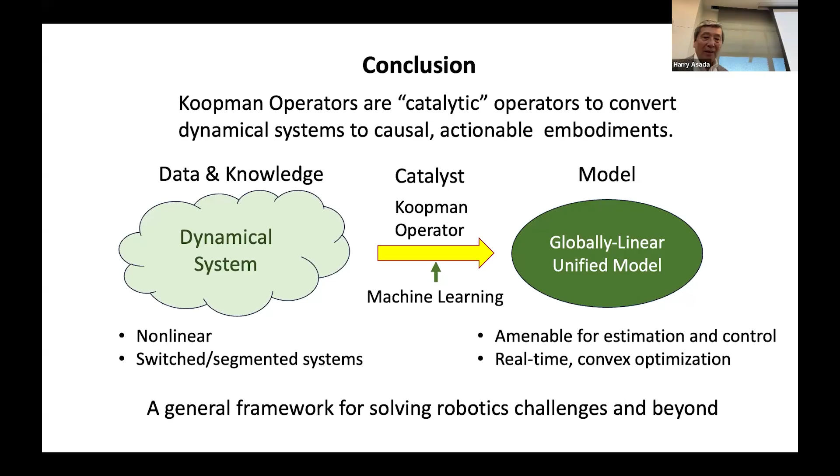So I see that the Koopman operator can serve as a catalytic operator, given some domain knowledge, equations of motion, or experimental data. We applied the Koopman operator together with machine learning to find the best basis functions or observables. The end result is a globally linear, unified model, which is very much amenable for estimation and control, where real-time and convex optimization are possible. So Koopman can be treated as a general framework for solving robotics challenges and beyond.

As far as human behavior is concerned, it's so complex that we can't make any good explanations. But it is conceivable that the human dynamic body control in motion, like a receiver catching the ball, where he uses his eyes and makes adjustments in such a dynamic environment, or soccer players dribbling while watching the opponents, it's hard to believe that the human is doing complex nonlinear optimizations.

Maybe dynamic prediction is very similar in the linear domain, but through years of training and experience, the difference is in this part: they know what the critical variables are, what's very informative and important, through a bunch of experience and training. In the end, they have an informative set of variables, and then making dynamic transitions may be linear, with the computation afterwards being so simple because of this form.